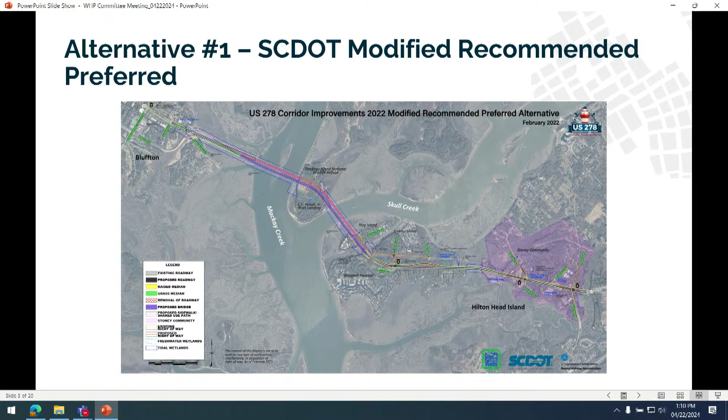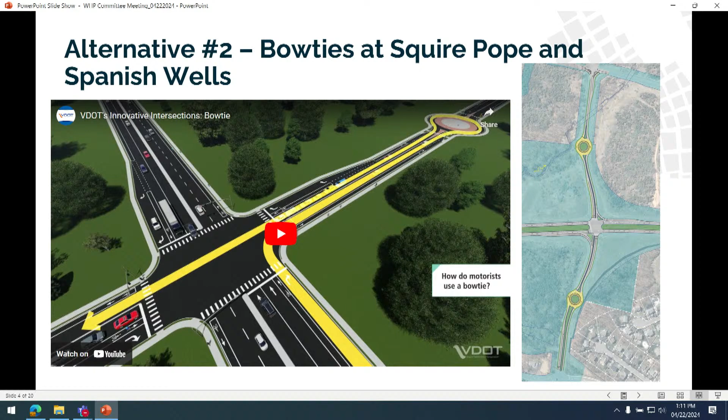Alternative 2 are the bow tie options — the dual roundabouts, north and south of Hilton Parkway. The goal was to remove the left turns from the main line, effectively turning into two-phase signals, helping intersection operation conditions, as well as providing better pedestrian travel ways, making it a little safer, with refuge islands. Even though it's a bit more of a circuitous pattern, as the table shows, it improves the overall travel times.

Alternative 3 were the echelons and center turn overpasses. These were our options with vertical grade separation at either Squire Pope or Spanish Wells Road. I know Kate has gone into these in great detail, I won't belabor them, but effectively, through grade separating, it's creating two-phase signals again to help with intersection efficiency, and also allowing for pedestrian refuge islands underneath the intersections themselves.

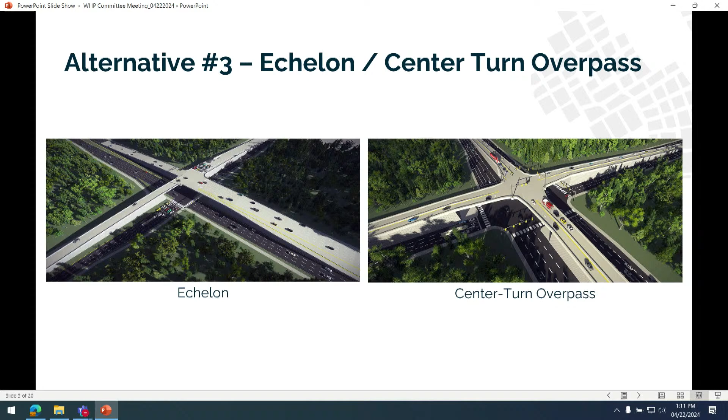And then alternative 4 is the elevated bypass. What I'd like to do is take a few moments to make sure everybody understands the tie-in points and geometries associated with that, since we haven't done that yet. So there are a few slides following, just so everybody understands what we're bringing forth for consideration.

The elevated bypass would have 2 lanes eastbound and 2 lanes westbound, residing within the inner portions of the corridor. As you come off the causeway from Jenkins Island, the inner 2 lanes would be eastbound and elevated, continuing over the Crazy Crab entrance and over Squire Pope Road. Conversely, the 2 inner lanes would be elevated going over these locations, tying back in prior to the causeway. Throughout the corridor, we'd have a single eastbound and single westbound lane, allowing full access to the intersections themselves.

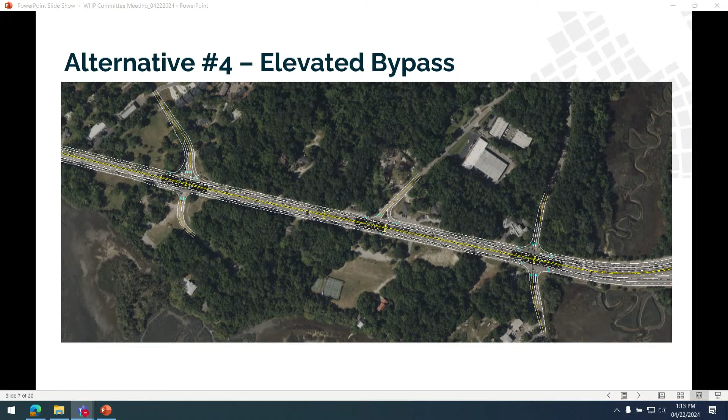You see this black area — that's just to indicate, I'll show this more zoomed in on another slide, what the geometry would be. Along the corridor, it would be 2 lanes eastbound, 2 lanes westbound in the center. The next slide will show how everything works at the Cross Island Parkway — single lane eastbound, single lane westbound, with left turn pockets at all intersections to maintain that left turn.

This slide really helps, hopefully everybody can see — it's a little zoomed out, but I'll walk through it. If we're traveling eastbound, as you approach, motorists would have 3 options: exit here to get back down to Gumtree at grade, remain elevated to go over the new bypass over the existing Cross Island Parkway and over Gumtree Road, which I'll show in another slide, or access the existing Cross Island Parkway and continue south to the south end of the island.

Westbound, there would be 2 lanes that merge into 1 at this location, and the existing Cross Island Parkway, as we know, also merges into 1 at this location. So that would be our 2 lanes traveling westbound. At grade from Gumtree Road, as exists today, we have 2 westbound lanes that come up to Gumtree, and I'll show a subsequent slide, but first one of the lanes would drop off at Old Wild Horse.

As we approach Gumtree Road, we'd have at-grade travel lanes similar to what's in place today. The elevated bypass would go over the existing Cross Island Parkway, travel over Gumtree, and tie down west of Wilborn. The at-grade lanes from Gumtree would come in parallel, tying in again west of Wilborn.

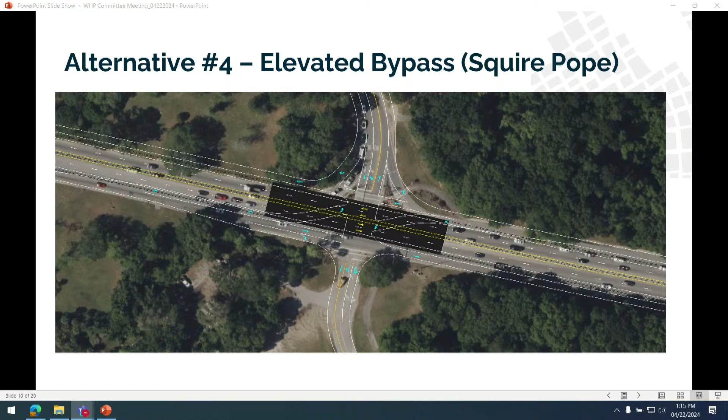This is a zoomed-in view of the Squire Pope Road intersection — again, single lane eastbound, single lane westbound. We can have left turn pockets, which shrinks down the intersection, and we could have refuge islands right here. This also provides a view of what the elevated lanes are. Likewise, at Spanish Wells, a similar configuration.

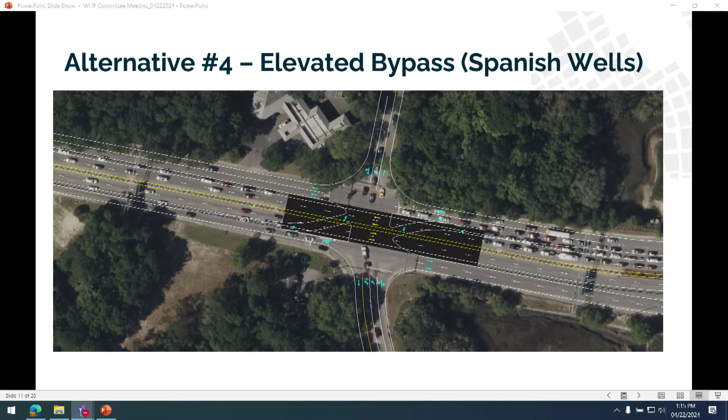Then at Gumtree Road, as I discussed, it's elevated and would tie in west of Wilborn — elevated lanes westbound, and these would be the at-grade lanes.

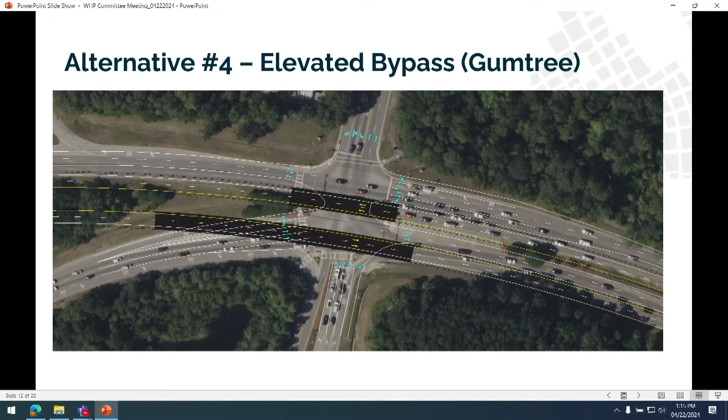What I wanted to emphasize is that these are done using Synchro SimTraffic software, and in this unique configuration, where one movement is elevated and one at grade, all the others are essentially at grade. Yes, the echelon may be raising it up, but it's really like one corridor, whereas this option would have essentially two running parallel to one another. Unfortunately, one of the limitations of Synchro is that it can't model the elevated portion.

However, should the town and committee desire to pursue more evaluations of alternative 4, VISSIM would be able to do that. This would show a more significant reduction if you were to look at the corridor between Moss Creek and Indigo Run.

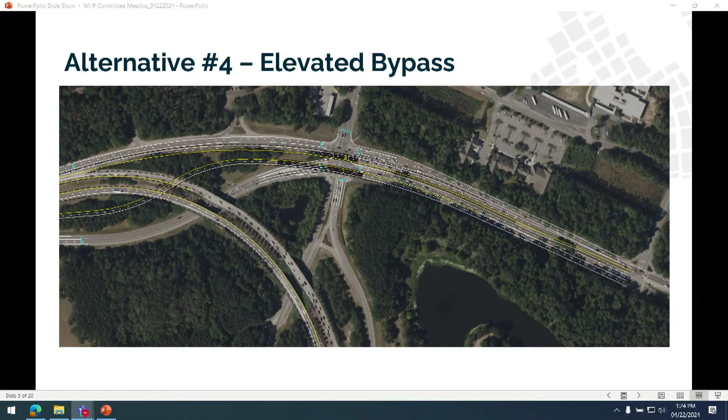And do we know how much higher it has to be for clearance? I'm just trying to get a gauge because I drive that, and if there's another roadway above that bypass, is it another 15 feet higher? You're going to be, yeah. I mean, generally bridge clearances are 17, 18 feet plus the thickness of the structure. So from the existing roadway, you're up 20, 22 feet probably to the roadway surface above.

I just wanted to make that point. If you were going off island on the Cross Island, you would have another lane that would be above, tying back into the business route past Gumtree, relative to the grades of each approach on that overpass.

Warren, whenever you calculate the tie-down points, did you take that into consideration? Yeah, we've got plenty of distance to get back down there. By the time it lays out, by the time you go over that, you can immediately start coming back down and be just what you need to get over Gumtree. And then from there, you taper down to get to grade beyond Gumtree. Basically, you only have to go that extra height up to get over the Cross Island. Otherwise, you'd stay down lower through the rest of it.

And even between Squire Pope and Spanish Wells, if you decided you didn't want the full access at Old Wild Horse, you could even come back down close to existing grade, or at the existing grade, between those two to reduce the amount of elevated section. But because we're showing full access there and a bridge at Old Wild Horse, we just figured it would stay elevated instead of going up and back down a lot and making it look like a roller coaster.

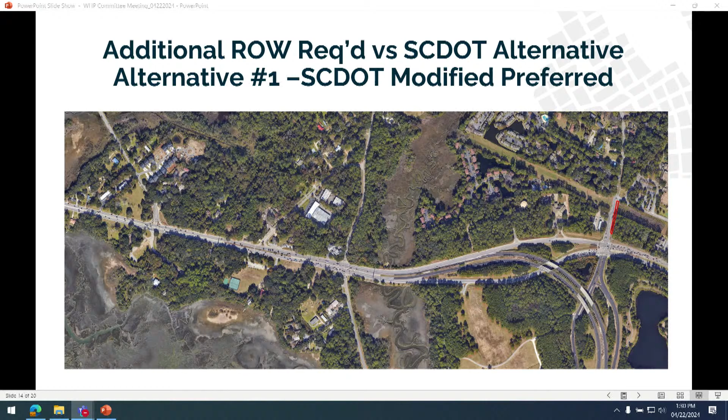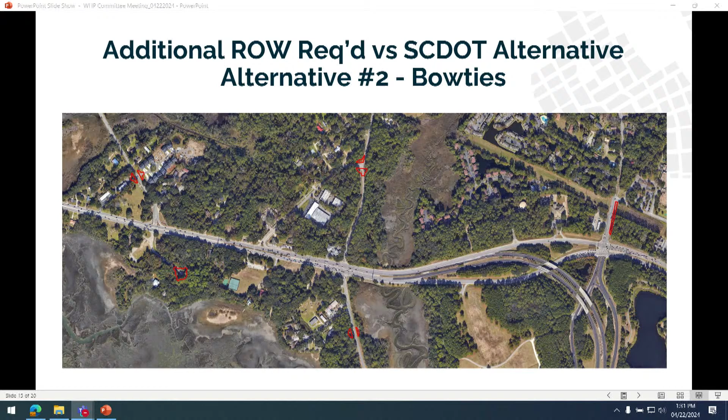Alternative 2 are the bow ties. You can see the widenings that would be required for the roundabouts north and south of Hilton Parkway, in addition to the parcel I just mentioned at Gumtree. Alternative 3 would be what would be required if flyovers were constructed either at Squire Pope or Spanish Wells, and again the improvements at Gumtree. Center turn overpasses, likewise, what would be required at Spanish Wells, Squire Pope, and Gumtree Road.

And then alternative 4, there's no slide with that because we feel we could very likely be within SCDOT's proposed right-of-way limits. We would not need any additional right-of-way for the elevated bypasses we have shown.

Before you go to the next slide, it's important to note that in this evaluation we've extended the town's project area for study, that the property identified near the Gumtree intersection is not within the traditional cultural property, it's not within what the county and SCDOT have defined as the project area. So while there's 0.2 acres of additional impact to town property at Gumtree, it doesn't increase the impact through the Stoney community. So alternatives 1 and 4 have no additional impact within the Stoney community, but alternatives 2 and 3 do.

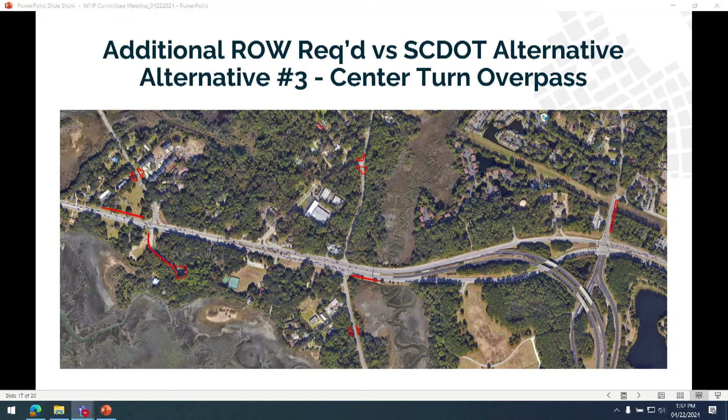As I mentioned in my introduction, the action items you all asked us to prepare were just a delineation between the public and private right-of-way parcels for those right-of-ways I just described. So walking through from left to right, in alternative 1, at the point we referenced before, all of that is within the publicly owned right-of-way.

Alternative 2, out of the 1.1 acres referenced before, we have 0.74 plus the 0.2 at Gumtree Road. That gives us 0.94 of public right-of-way, 0.16 of private right-of-way. Alternative 3 would be 0.66 plus the 0.2 from Gumtree Road, as mentioned, alternative 1, plus the 0.54 of private right-of-way. That gives us 1.4 acres of right-of-way that was shown at the last meeting.

And then from a cost standpoint, as Dietrich alluded to, yes, we did use Beaufort County's $425 million budget as a base moving forward, but we really looked at it from a delta standpoint. Lauren evaluated what he felt the increase would be, how much more it would be from that base point. So we had 425 starting alternative 1, 425 million. And we estimated conservatively that you take $1 million for the improvements at Gumtree, that would be the widening we showed, some internal intersection improvements that would need to be made within right-of-way, and completely reconstructing all of the signal infrastructure there.